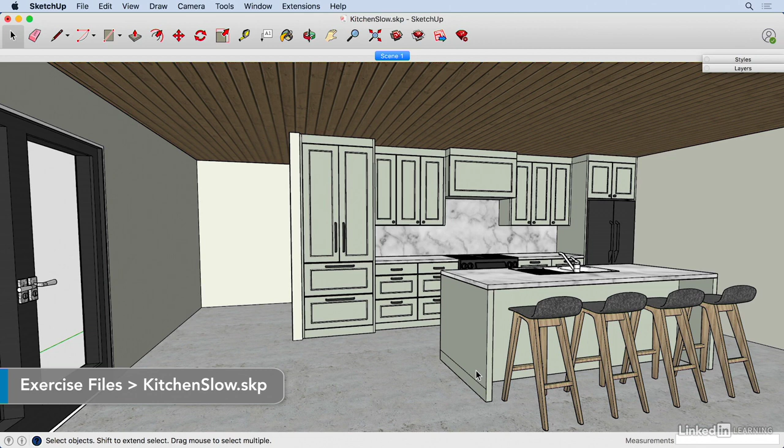When using SketchUp, it's important to keep an eye on a few settings just to make sure that our model runs quickly and smoothly. So here's a few tips to keep your SketchUp model running quickly. First tip is to use styles that have a green clock on the icon.

So I'm going to open my styles window. You'll find some icons that have a small green clock in the lower right-hand corner of their thumbnail. These are fast styles that use settings to render more quickly as you zoom, orbit, and move throughout your model.

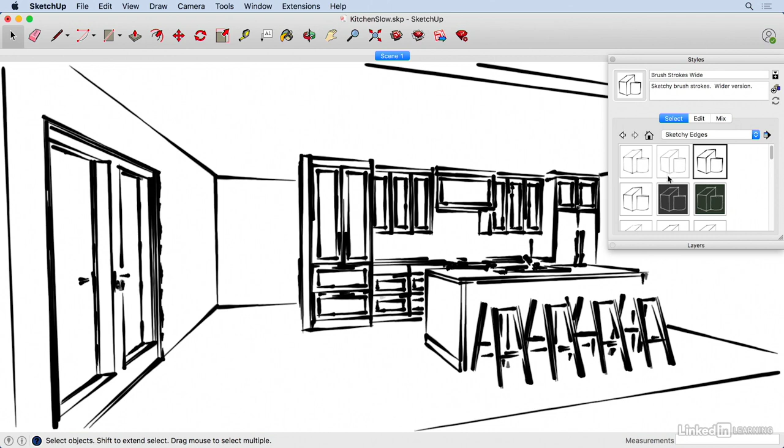You'll notice that some styles don't have these green clocks by them. And those are fun to show other people your model, or present it, but they're not great for active modeling. A side note on the styles, you want to limit your use of the shadows.

So under View, Shadows, and Fog, you want to limit your use of shadows and fog to only presentation scenes and styles. So as you're actively modeling, make sure that those are turned off because that will significantly slow down SketchUp as it tries to process them each time you make changes to the drawing or you change the view. So I'll turn those off under View, Shadows.

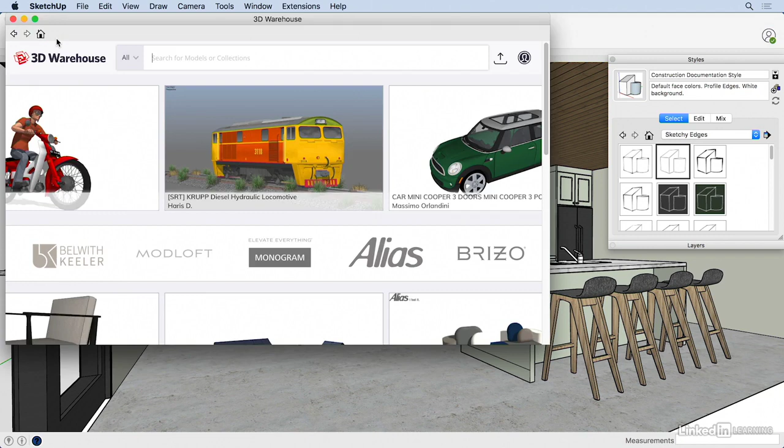The next tip is to use models with a smaller file size. So if I'm bringing in a model from an external source, like the 3D Warehouse, be sure to keep an eye on the file size. For example, if I click on this chair and check out the polygon count and the file size, I just want to make sure that I keep that number fairly low.

There really isn't a magic number here. Just want to keep an eye on it because the larger the number, the more it will weigh down your file. If you find something that you absolutely must use in your model, feel free to bring it in, but then put it on its own layer and turn that layer off for your working scenes. Only turn that layer back on when you're ready to use it or present your file.

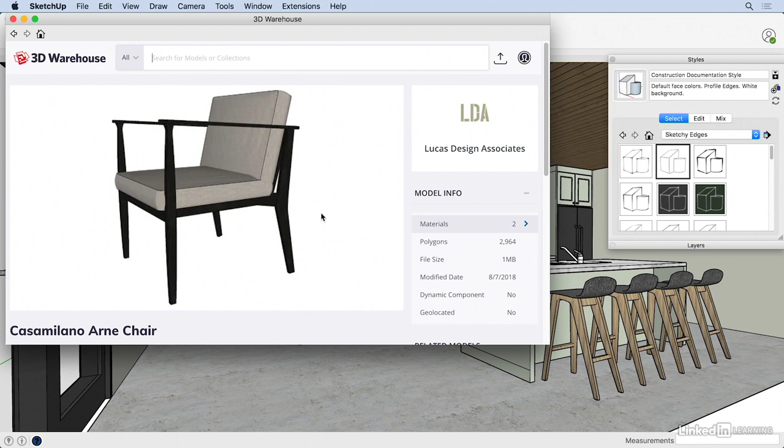Lastly, to keep your SketchUp model running quickly, you want to make sure that you purge your model periodically. So when we purge our model, we're clearing out items that have been deleted. So if I open my colors window here and I click on the Home button, I can see the colors in model. So some of these colors are no longer actually being used in the model. They were just there at some point.

So just because I take a texture or a color out of the model doesn't mean it's deleted from the file. Same goes with layers. I'm going to add a layer and call it chairs. Nothing's living on that layer, but it's added to our file size. Same goes with the styles. All of these styles have been used at some point. They're no longer being used, but they're still in the file.

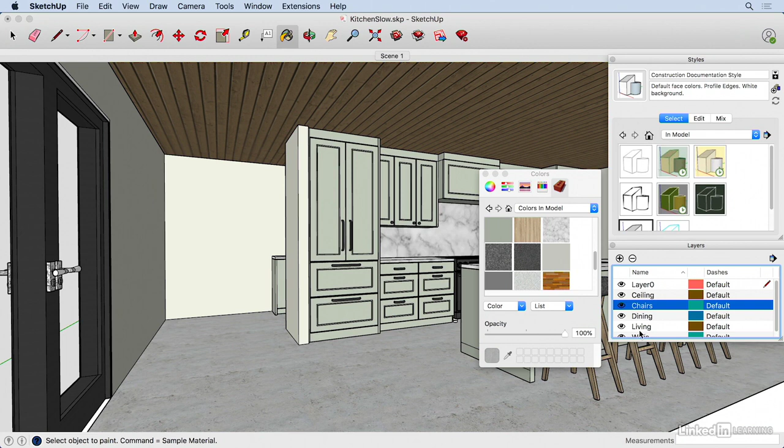So we need to go ahead and clear out all of these lists by purging. So what we can do is go to Window, Model Info, scroll down here to Statistics, and click Purge Unused. And as I do that, keep an eye on these lists, and you'll see that they all shrink. Only what is currently being used in the file.

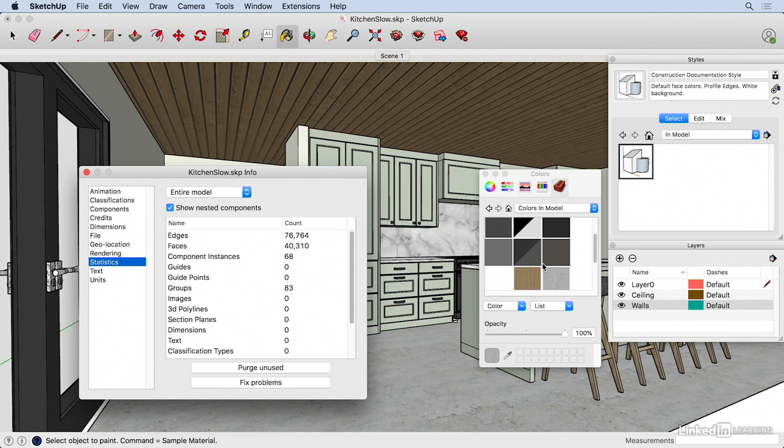That's going to keep your file size smaller, and your lists become a little bit more manageable as well. So these methods will all help ensure your model runs quickly and smoothly.